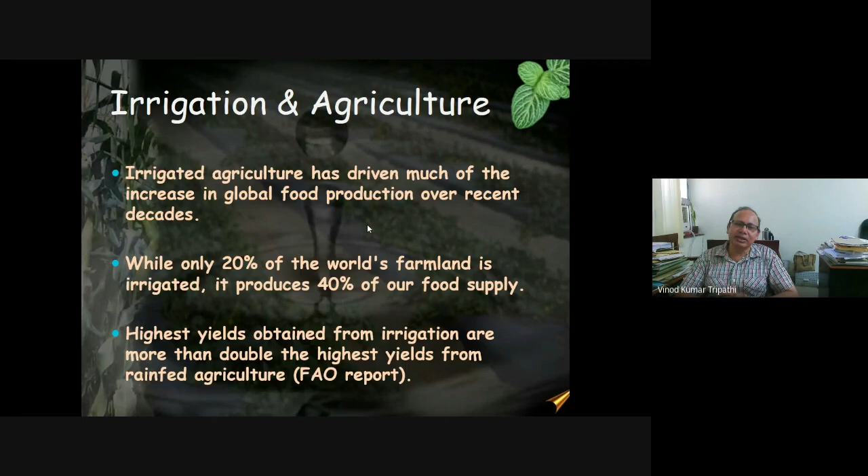We obtain higher yield under irrigation because water gives a multiplicative enhancement in the yield response. Poor quality water contains different types of undesirable elements. Number one is salt content, which we see in the form of salinity. Salt content depends upon the geological formations and the processes in which the water is utilized.

If that process produces salt, then the wastewater coming out will also become saline. Then the water infiltration rate: because of high sodium and low calcium content of the soil or water, the rate at which water enters the soil reduces due to the flocculating nature. So the rate of infiltration is also reduced because of the availability of these ions.

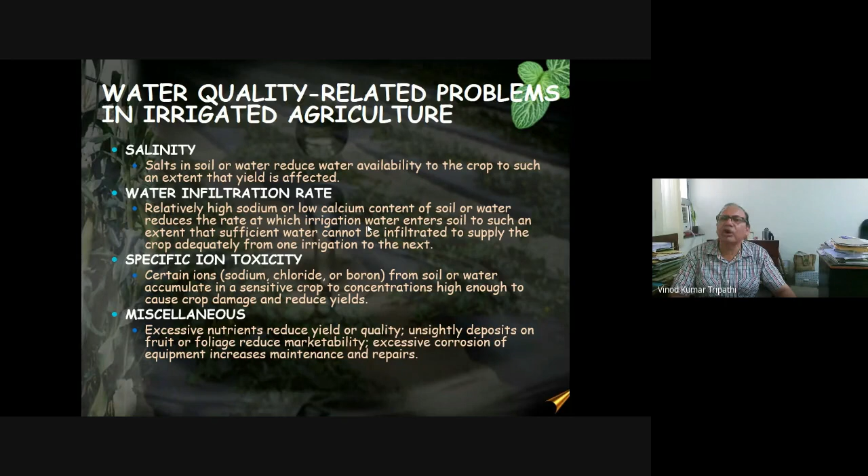Then we have specific ion toxicity. Specific ion toxicity depends upon the different types of industries. Some industries give a particular ion, another industry gives another type of ion toxicity, because of the different processes involved in utilizing the water, and the wastewater coming out contains different types of specific toxicity.

Then we can see here another type of problem which contains the poor quality water, that is the microbial contamination. These microorganisms, we can say bacteria, virus, helminths. These are the microbes which are present in the water, and sometimes they are not visible by the naked eyes. So this microbial contamination is also present.

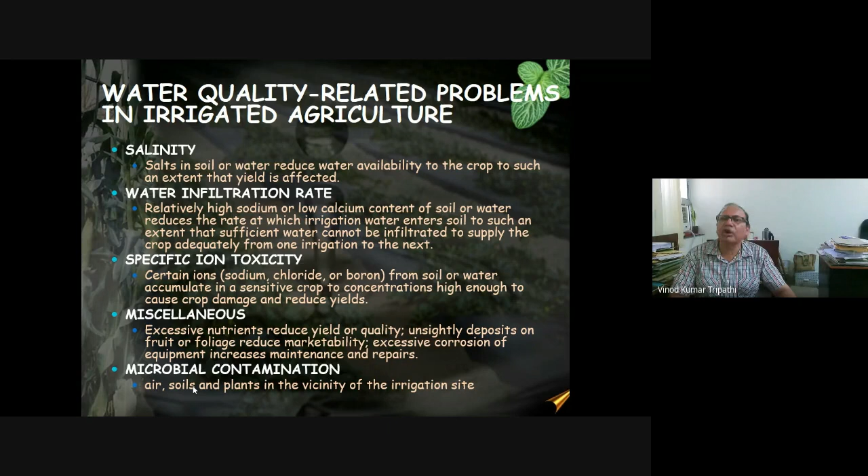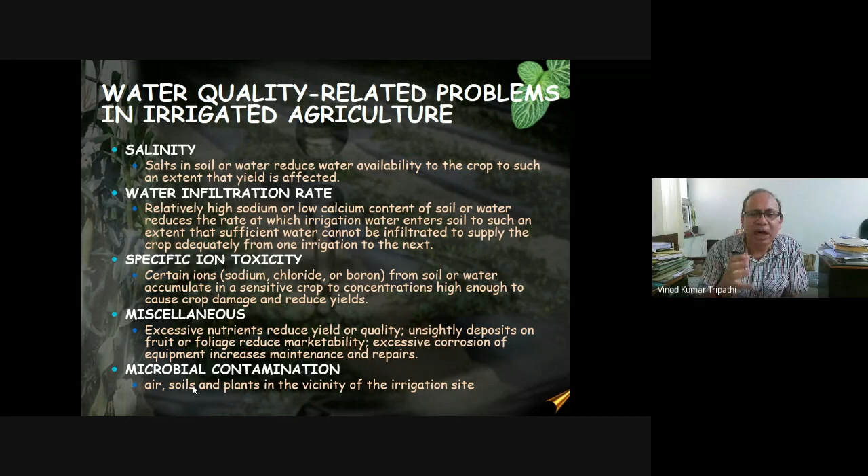So the issue is that these challenges we have to, when we plan the utilization of the poor quality water, we have to overcome: how we can reduce the toxicity of these elements, these microbes. Reduction in the toxicity is the main important issue for the utilization of this type of water.

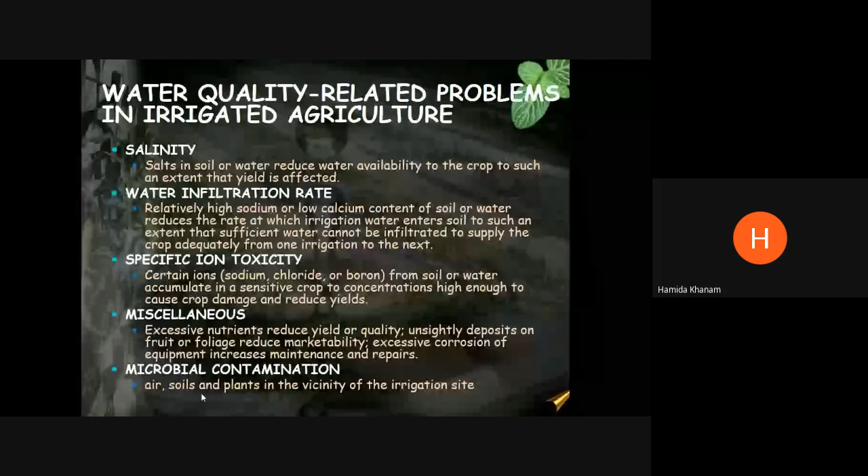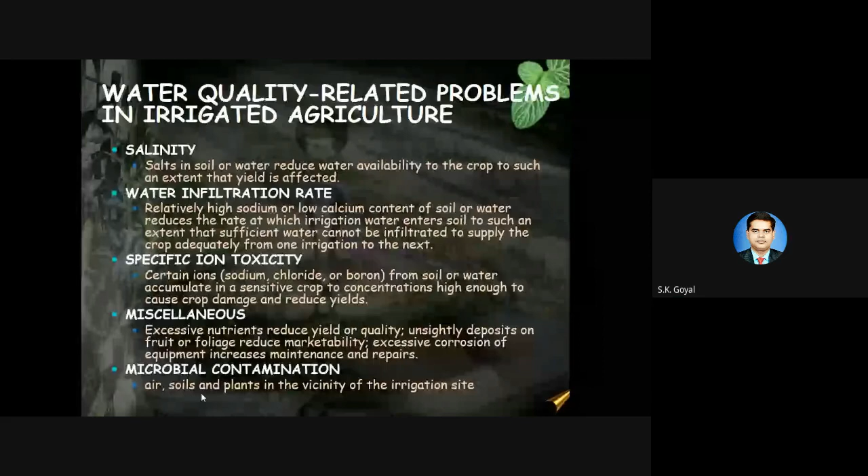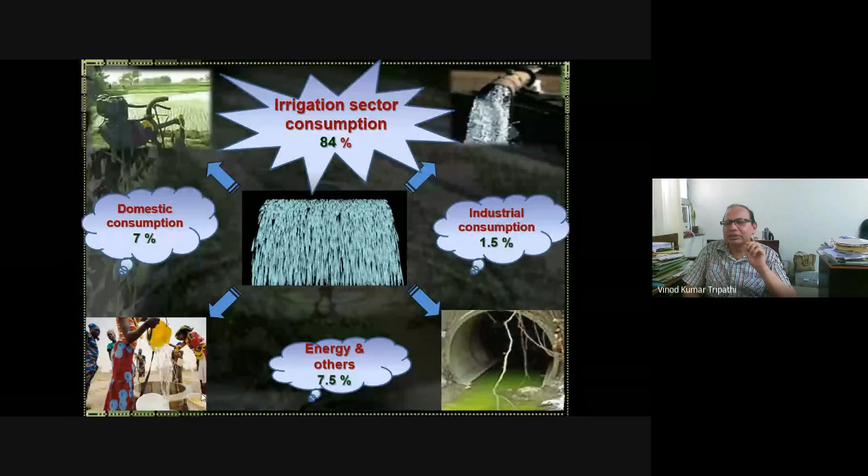Thank you. So, friends, if you see the consumption of water in our Indian subcontinent, the irrigation sector is the highest consumer of water, and after that you see our energy and industrial sector. In the energy sector, at most of the places, thermal power plants are coming. Thermal power plants utilize steam because steam turbines have better efficiency in comparison to the other turbines.

So the heat generated through the coal or through radioactive reactions produces the vapors, and that steam is utilized for the operation of the turbines. And in the domestic sector, in our day-to-day life, we are utilizing water, but the highest consumer is the irrigation sector. So this is also the need of the hour. We can do something so that we can fulfill the irrigation sector demand.

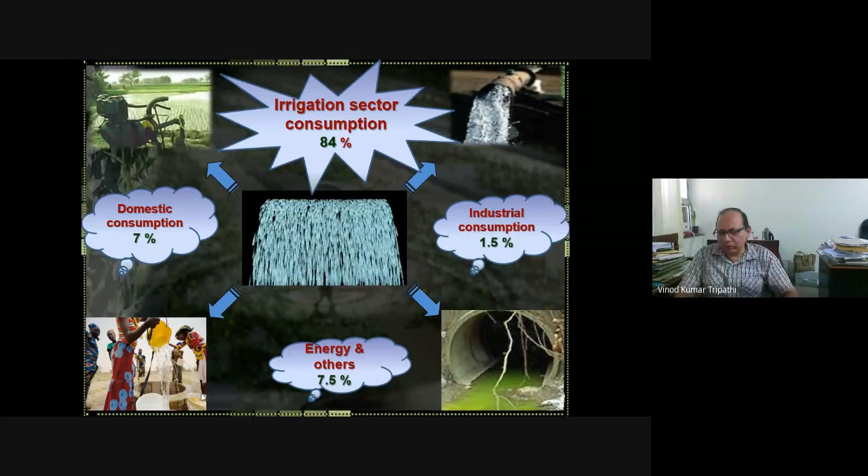Due to the development of the industries and the growth of the population, we are bound to divert more water towards the domestic sector and industrial sector. So if you divert more water towards the domestic and industrial sector, definitely we have to reduce the water demand in the irrigation sector. This will be the challenge.

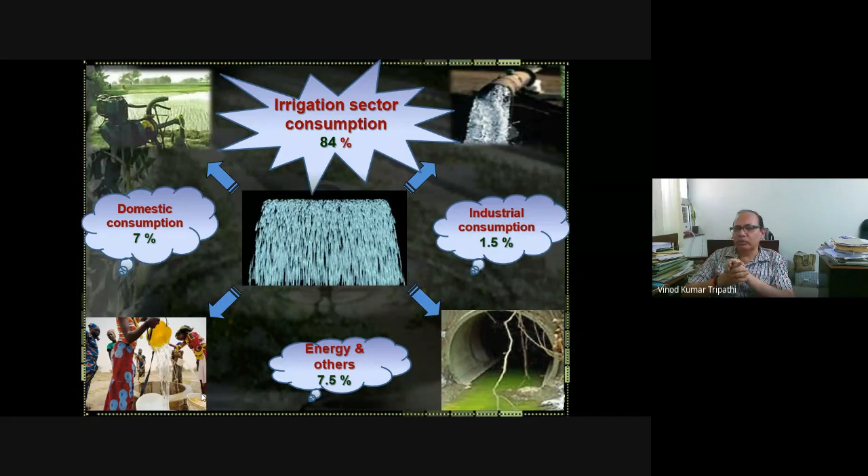So if you want to reduce the good quality water demand in the irrigation sector, we have two options. Number one, we can utilize the water which is used in other sectors as wastewater in the irrigation sector. And second, we can enhance the efficiency of the irrigation sector. If we can enhance it, we can utilize less quantity of water for more area through advanced irrigation methods like the micro irrigation method.

So that's why in this topic I have concentrated on two important aspects. Number one, utilization of poor quality water in the irrigation sector to fulfill the irrigation sector demand, and it will also be helpful to fulfill the future requirement of good quality water in the other sectors like the industrial sector and the domestic sector. So that's why in this topic we have taken micro irrigation and poor quality water.

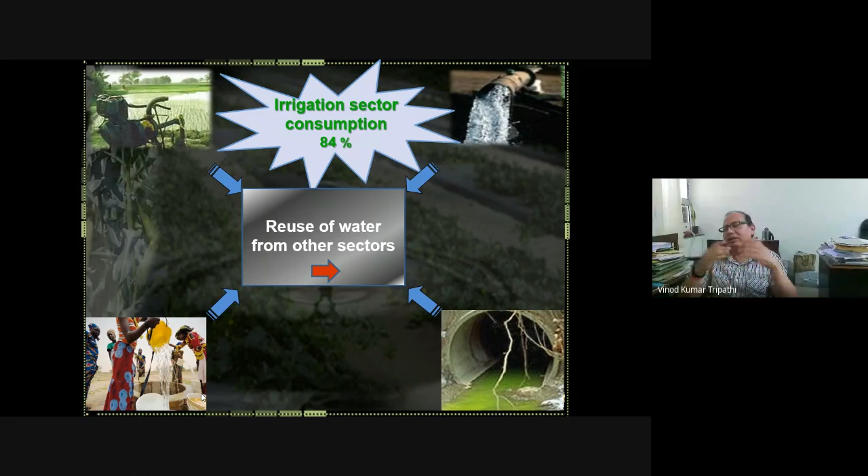Then friends, if you see nowadays in India, this is a little old data, around 40,000 million liters of wastewater is generated in different parts of the country. So a huge quantity of wastewater is generated, and this is old data. In future, due to the growth of urbanization, if you see the world level, the urban population has crossed the rural population. So at the world level, what is the scenario?

If our world becomes more urban in comparison to rural, wastewater generation from the urban area will be higher, and the government does not have much capacity to treat this wastewater at the individual level. So it gives different types of restrictions to the industries that they should treat this wastewater before releasing it out of the industry, so that there will be less toxicity in the environment.

Number one. Second, the government is also planning: in the industrial zones, the government is making the plan for common treatment plants. In the common treatment plant, they give a certain level of treatment to the wastewater which is generated from the different industries. But much emphasis is on the industries because they are giving much polluted water.

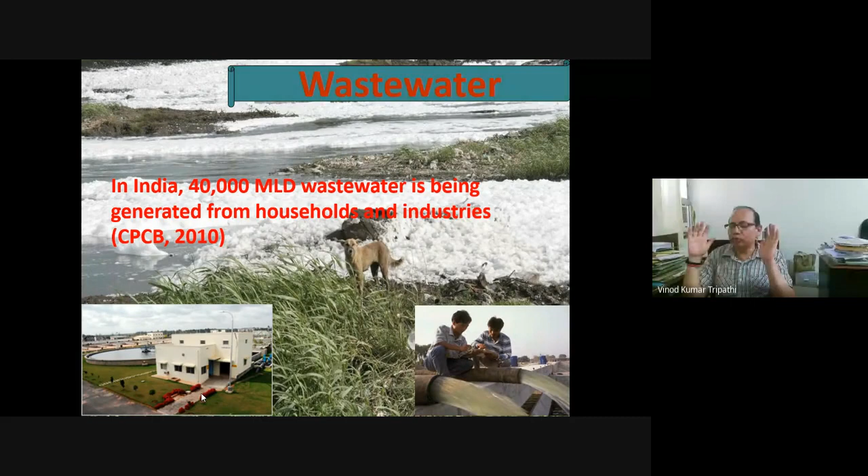But in the domestic sector, not much importance is given to the wastewater which is generated, even at the government level or municipality level. They are giving importance to a certain level, but they are giving more priority to the industries, because they generate the more polluted water, which has more contamination. So under this scenario, we have the concern that the wastewater which is generated, we can utilize it in the irrigation sector.

So number one, you can say the good thing is the quantitative terms. Quantity means we have a huge amount of wastewater. And second, if wastewater will be utilized, then we will give some treatment to it. Otherwise, we will throw it into the environment. If we throw it into the environment, it will create environmental challenges and harm to our ecosystem. We have to clean it and utilize it, so it will be economical. Otherwise, if we just throw it, it will create environmental challenges.

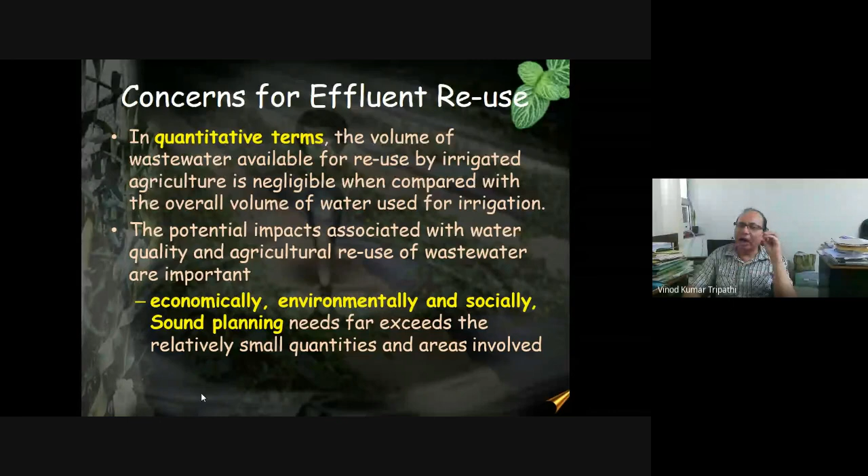So that's why we want quantitatively, economically, environmentally, and socially sound planning for the utilization of the wastewater. And we have to see some public health standards in the utilization of this wastewater, wherever this water is going to be utilized. Let's say we are utilizing it for a particular crop, so we have to see the produce, the quality of the produce, and the standard of that produce, the different elements available in the produce against the different standards.

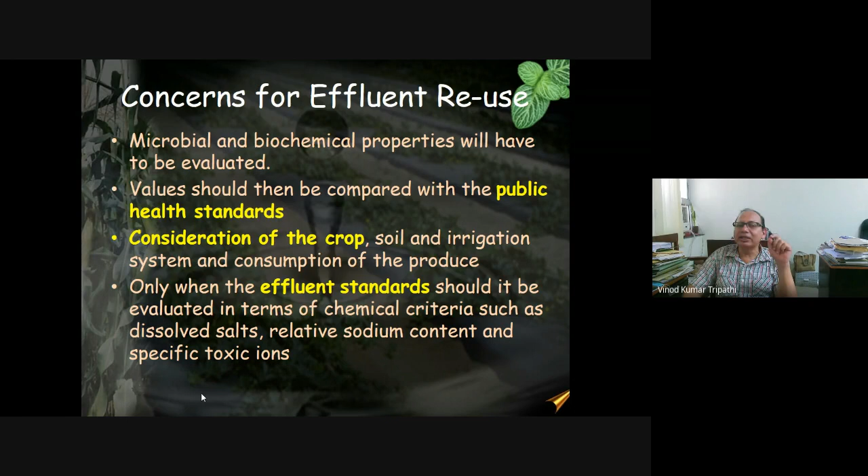So that's why there is a need. We have to develop some public health standards. Some standards are already there to utilize this type of poor quality water, and in which crop we have to utilize it, so that it will be less harmful for the people who are going to use that produce.

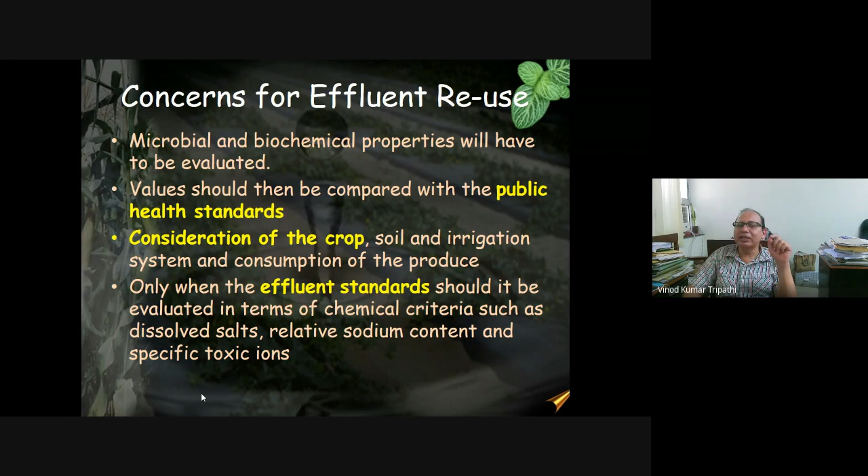So one of the primary treatment systems for poor quality water which is feasible, I'm not recommending those things which can be utilized for the higher level industries. Higher level industries have the money, they can utilize different types of water treatment systems. But at the farmers level, for the irrigation sector, we have limitations, meaning we can treat the water up to a certain standard, a certain level. Otherwise, we cannot utilize it. So that's why one of the primary systems for the treatment of this wastewater or poor quality water is the constructed wetland.

In the constructed wetland, the main important aspect is sedimentation. Means whatever higher weight or higher volume objects, elements, or any type of impurities are available in the poor quality water can be settled. Due to the action of gravity, they will settle down. So first we can see that with the help of the sedimentation process. Then we can pass this water through the filters. Those filters are in layers.

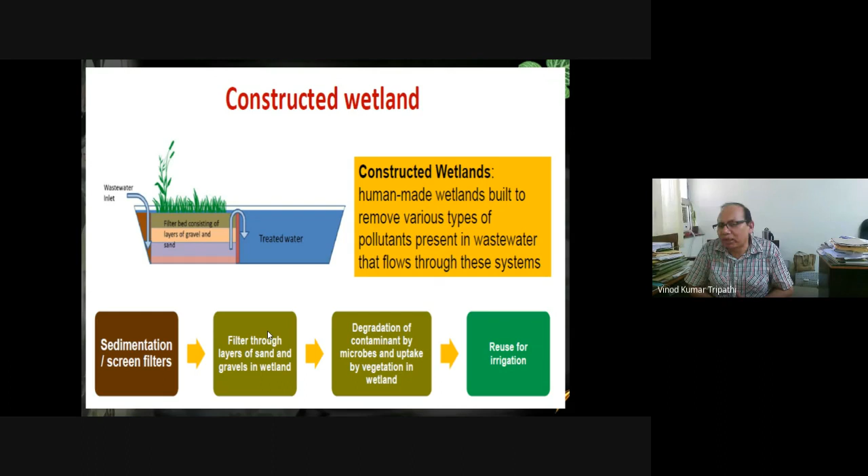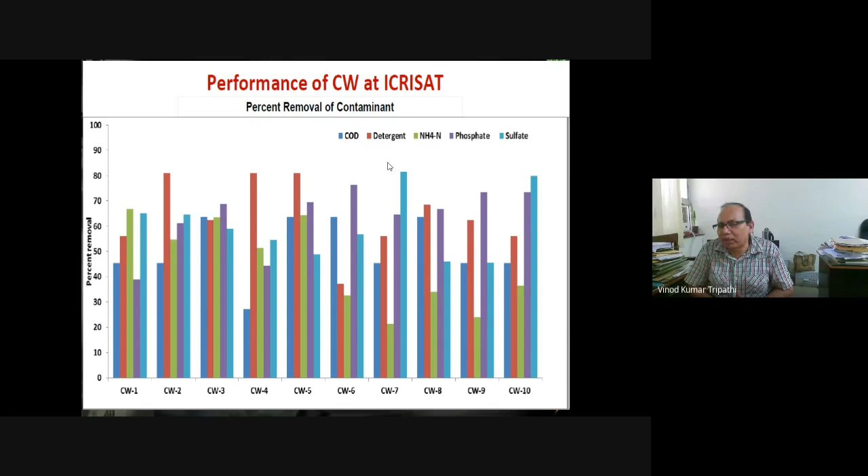So up to a certain level of treatment, a certain level of purity, we can provide with the help of constructed wetlands. And in the constructed wetlands, we can see here that for these chemical elements, a certain level of reduction or percentage of removal is possible. In this, you can see ammonium can reduce by 10 to 70%, nitrate, phosphate, and these species are utilized for constructed wetland purposes.

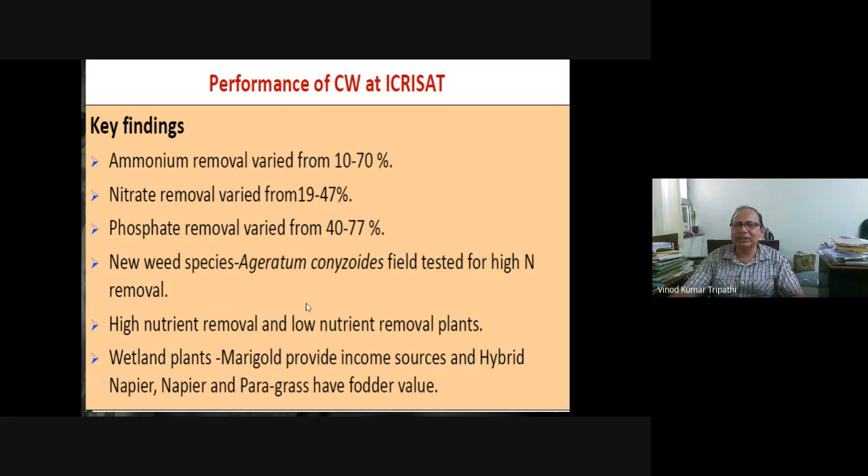Then if we can reduce the impurities up to a certain level, then we can use this water. We are advocating that we can use this water through drip irrigation or micro irrigation systems. Why is it? Number one, because micro irrigation systems have higher water use efficiency. Second, if we utilize these waters with the micro irrigation system, it will create minimum contact with the plant and the operators.

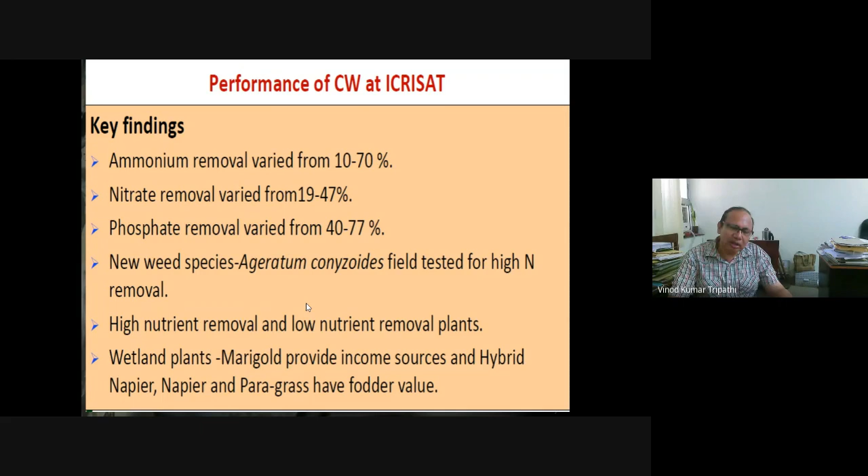So if there is less or minimum contact, the transfer of contamination from poor quality water to the irrigator, or to the fruits, will be minimum. So that's why it is also advisable. If we are utilizing it, it will be better; we have to utilize this with subsurface drip irrigation.

And if it is coming in your mind that there will be more cost involvement due to the use of subsurface drip irrigation, in that aspect I want to say that you can visualize here: in surface irrigation, on top of the land surface, there is wetting. Due to this wetting, there is germination of weeds. But in subsurface drip irrigation, a very small amount of water comes to the top of the land surface, while more water is available in the root zone.

So what happens? The amount of weeds growing under subsurface irrigation will be less in comparison to surface drip irrigation. In this way we can reduce the weeding cost and weedicide cost also. That cost we can divert to even a 5 centimeter thickness spade or any implement which can make a depth of 15 centimeters from the land surface. It will not have much cost involvement and is very good for protection from contact of the wastewater with the irrigator and the produce.

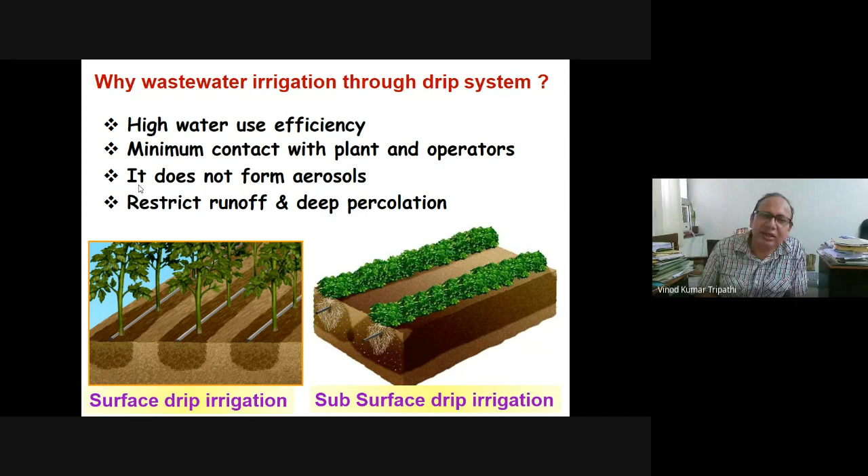But the limitation is that if we utilize it for the drip irrigation system, it requires a very good filtration system. If the filtration system is not good, then, as you know, water in drip irrigation comes from the emitters, and the emitter has a very small diameter path. So foreign particles will be deposited in the path and clog the emitters. To avoid that, we have to go for a very good filtration system.

And those filtration systems require frequent cleaning of the filters, because if you don't clean the filters, there will be more pressure on the pump, your energy requirement will be enhanced, and there will be a reduction in the water application rate. That's why, for utilization of wastewater, automatic cleaning of the filters is recommended. After certain hours of operation, the filters automatically go for back flushing, and in the back flushing operation they are automatically cleaned.

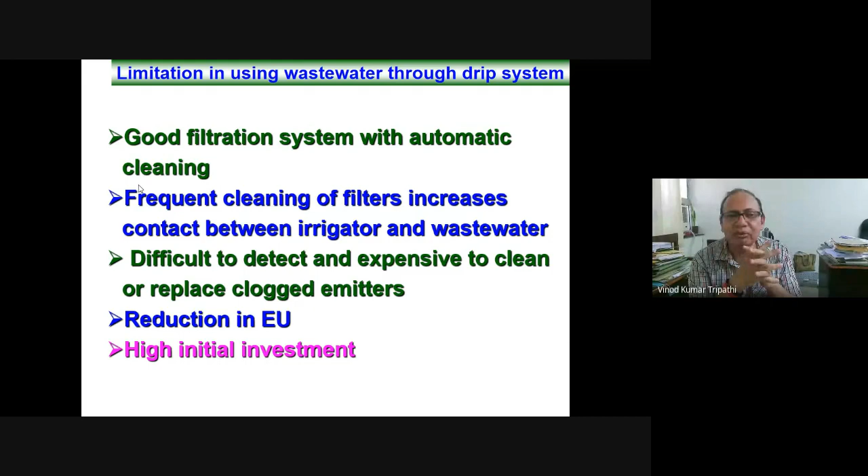For better filtration, there is a strategy which has been utilized: we can use the gravel media filter and disc filter in combination. What is the advantage? The pore spaces in the gravel media filter are bigger in comparison to the disc filters. In disc filters, the discs are stacked one over another, and the space between two discs is very small. So even soluble impurities will be reduced to a certain extent as they pass between the discs in the disc filters.

And we can utilize these waters; an experiment was conducted for surface and subsurface placement, at 15 centimeters and 30 centimeters. Better performance was achieved with subsurface placement of the emitters at 15 centimeter depth.

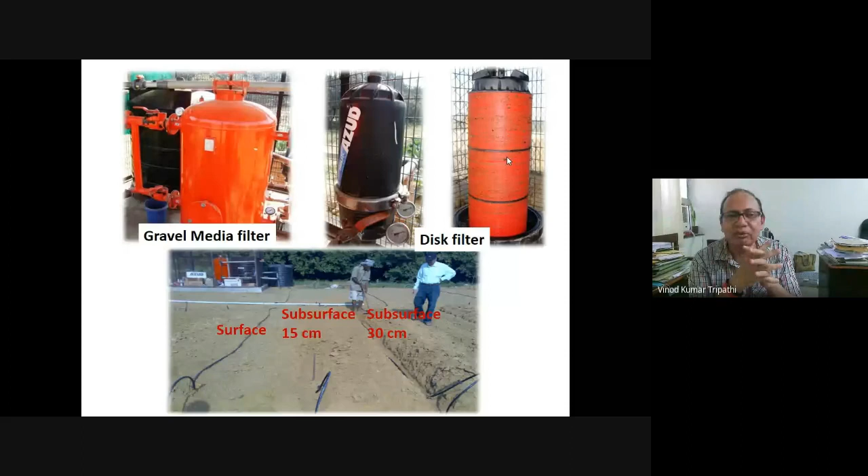And these are the physical and chemical impurities, but biological impurities, or you can say microorganisms, are also available. The counting of these microorganisms we can do through different methods. We can grow the colonies of the microorganisms on agars, or we can utilize the total coliform by the MPN method for the estimation of the impurities in terms of microorganisms.

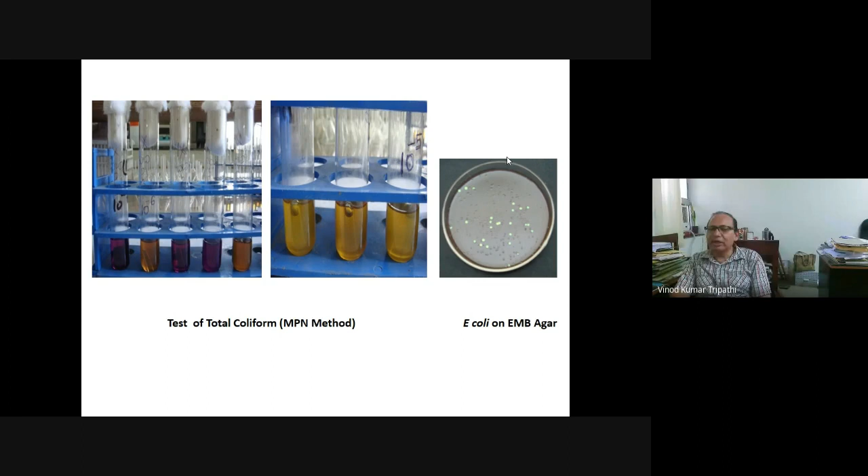One of the microorganisms is E. coli. What is the availability of E. coli if we utilize this water in the surface and subsurface drip irrigation system? The availability of E. coli at the surface and different depths we can see, if we apply the water at the subsurface by placing the emitters 30 centimeters below the ground, placed at 30 centimeter depth.

So we can see that the availability of E. coli on the surface of the land is zero. E. coli is not detected on the surface of the land if we place the emitters at 30 centimeter depth. Their availability is lower, or moderate, when we place the emitters at 15 centimeter depth. But the highest availability of E. coli on the land surface is when we provide the water through surface drip irrigation. This is the scenario we have seen in the crop 25 days after transplanting.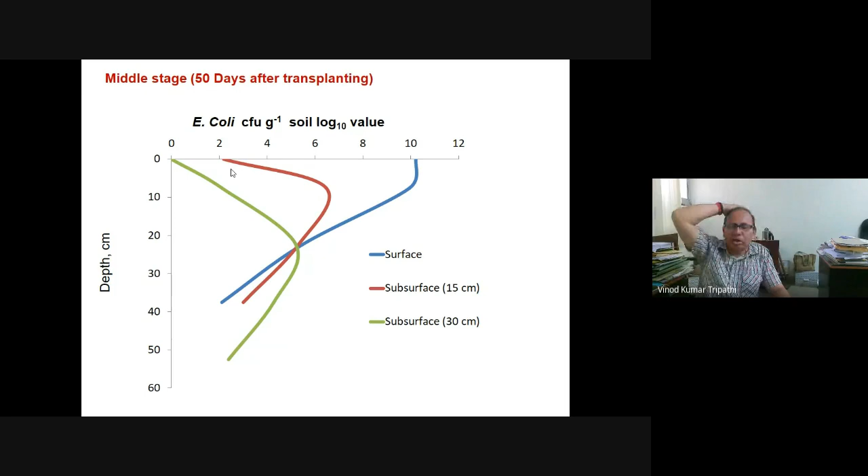So still we can see there is no E. coli when we place at 30 centimeter depth, but at 15 centimeter depth there is availability of E. coli at 2 log values, not more than that. After a certain period, the population of E. coli is consolidated. There is no enhancement in the E. coli population after certain days of irrigation.

So this is the crop in which this water has been utilized. This is the produce. And we can see the performance of the leaf area index under different methods of irrigation. D1 is the surface irrigation method, D2 is subsurface at 15 centimeter, and D3 is subsurface with placement of laterals at 30 centimeter depth.

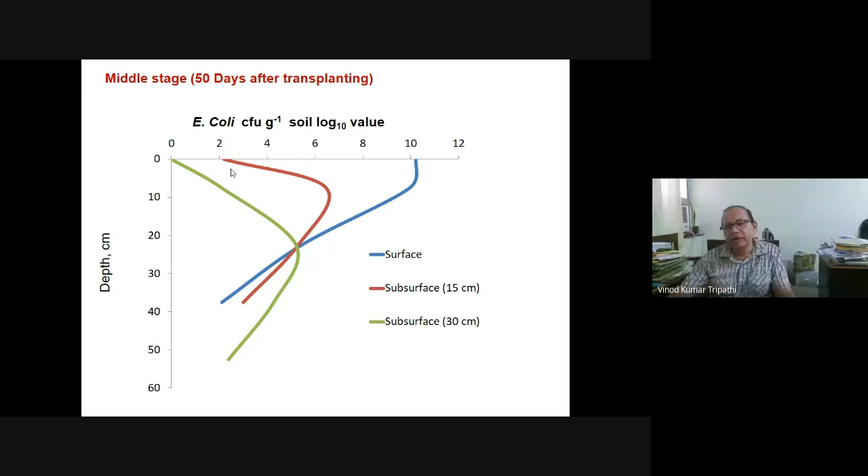Under this condition, initially the leaf area index is higher under the surface placed laterals. But after 45 to 50 days after transplanting, we are getting better performance from the subsurface placed laterals. At 15 centimeter depth, subsurface placed laterals give a better leaf area index in comparison to the other treatments, in form of D1 and D3.

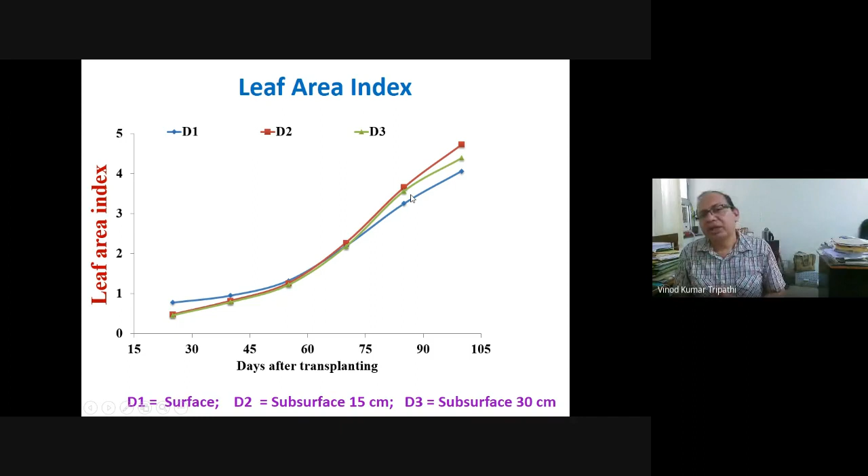If we see the yield in the different treatments, there is a higher yield in the second year in comparison to the first year. The reason is that whatever nutrients are available in the wastewater or poor quality water are accumulating in the soil and giving better results in the next years.

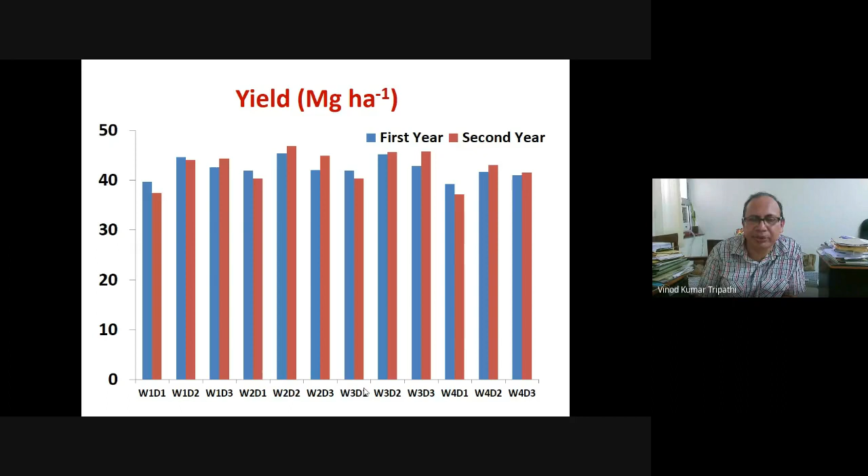Because this poor quality municipal water contains different types of nutrients, we can save NPK fertilizers. For the brinjal crop, or eggplant, it has been calculated that it can save 28% N, 21% P, and 38% K. So what is the advantage? With the use of poor quality water in terms of wastewater, we can reduce the fertilizers that should be applied, because wastewater already contains some amount of nutrients.

The safe limit for iron is 450 milligram per kg, and we can see this iron content, except in one treatment, is lower in all treatments, but close to 450 milligram per kg. Nowadays a fortification program is going on because ladies are lacking and suffering from anemia; students at small nurseries are also given iron tablets.

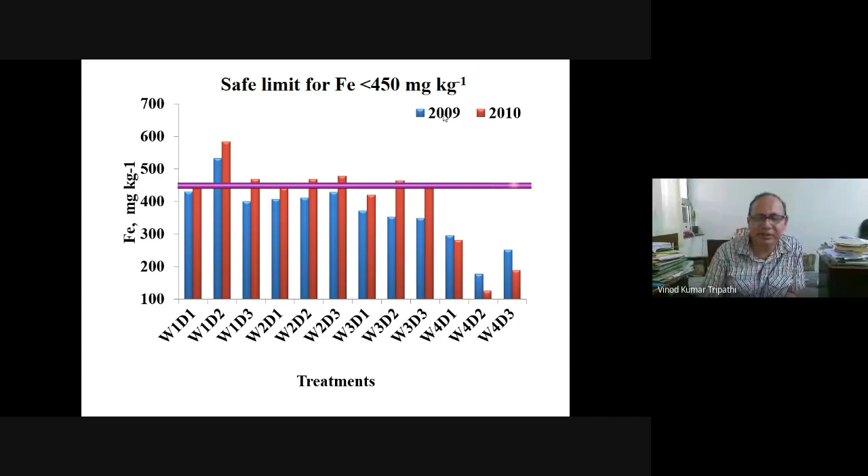For the crop restriction point of view, it is recommended that crops or produce eaten raw are not advisable to irrigate with poor quality water. So either we irrigate with good quality water, or we don't utilize it on crops eaten raw, like those used for salad purposes. Generally we have to restrict this.

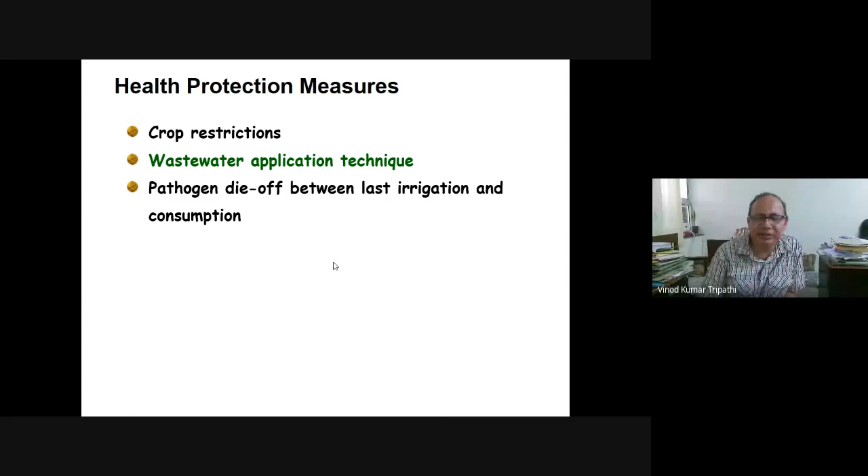Then wastewater application technique. We have to utilize such an application method so that our crop will grow and we can fulfill the irrigation demand, but we have to apply a limited amount of water, because this water contains impurity, and if applied to the soil it will accumulate. In the long run, after 20-30 years of continuous application, this may create problems, and there is a need to study the long-term impact of poor quality water on soil under different methods.

The third aspect is the health protection measure of pathogen die-off. If some pathogens or microorganisms enter into the plant system, it is not necessary that they will survive for a longer period after entry; they will die off after a certain period. Let's say in some plants they survive for 1 week, some plants for 10 or 15 days.

So what we have to do is stop poor quality water irrigation before the die-off period. Let's say the die-off period is 15 days; before those 15 days, we have to stop poor quality water irrigation. And if there is a need for further irrigation, we can apply good quality water so that we can get health protection.

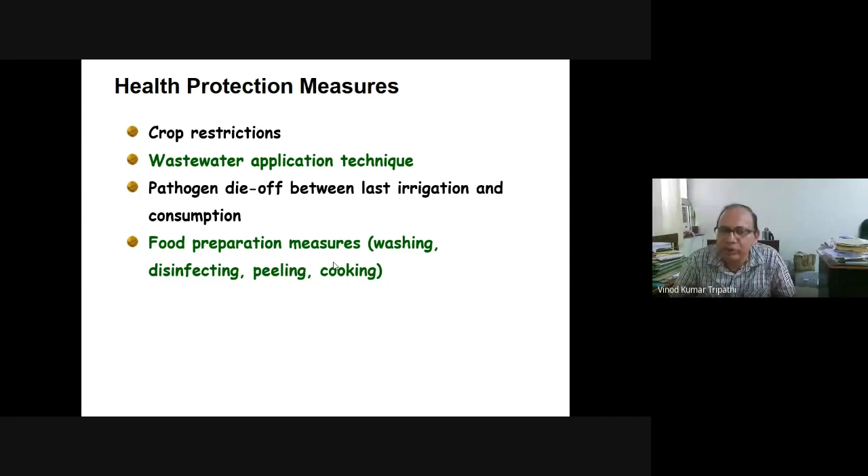For food preparation measures, we have to apply good quality washing. Then we have to use disinfectant and peel the produce, so that whatever microorganisms are available on the surface will go out. We have to cook the material properly, so the microorganisms present will die due to the higher temperature in the cooking process.

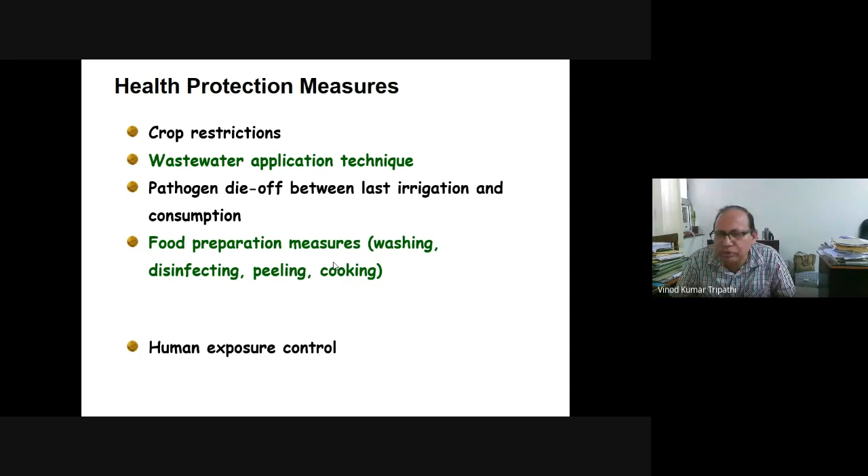Then human exposure control. Bacteria and virus can enter into the human body from any naked portion. Our hand is open, naked, our face is naked. Under these conditions, microorganisms can enter the body. So we have to reduce human exposure by providing some control.

And then wastewater treatment we have to do. The combination of these measures depends upon labor, fund, land, water, and social and cultural practices. It is not necessary that all practices are possible to apply at one place, but in combination, if we can apply them, it will be helpful.

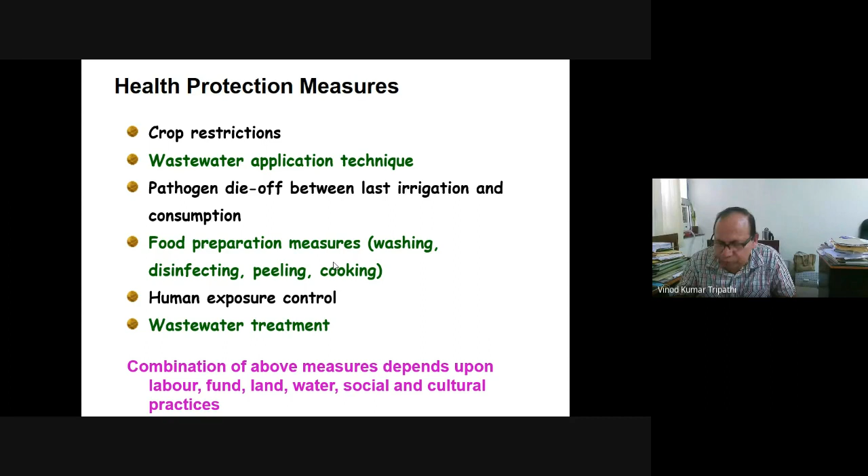So to come to the conclusion of this study: with the combination filters, the constructed wetland improves, using a combination of filters - drip irrigation filters, meaning gravel media filter and disc filters. If we can utilize them in combination, it gives better performance.

We get more clean water, better emission uniformity, less clogging of the emitters, and high leaf area index when placing the laterals at 15 centimeter depth, because of better utilization of nutrients, more utilization of water, and better root volume. More root volume will be under the wetted condition, so it provides more nutrient intake capacity for the plant.

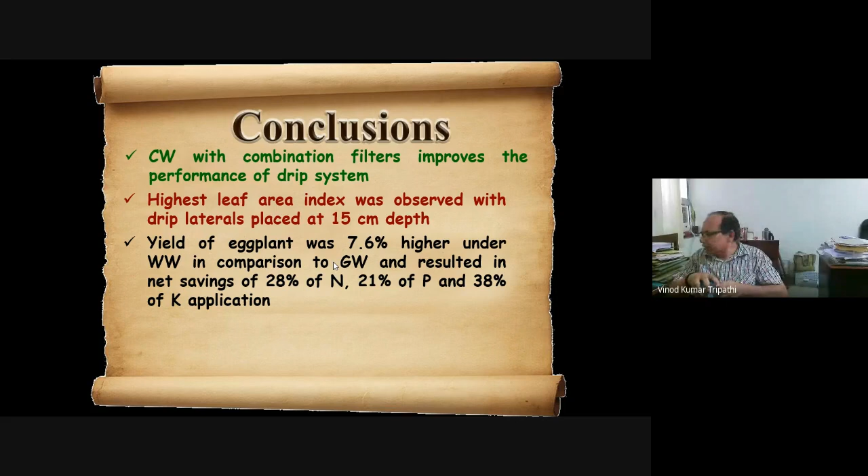Here we can see, for this experiment conducted with eggplant, wastewater irrigation gave 7.6% higher yield in comparison to groundwater irrigated plot, and we can save 28% nitrogen, 21% phosphorus, and 38% of the potassium application - meaning less amount of nutrients will be required to fulfill the crop demand.

And regarding heavy metal content available in poor quality water, we see these specific toxic elements have less availability in the produce, and they are within the control of the prescribed limit by different national and international standards, except iron, because iron is also required. We are doing different programs to enhance iron in women and children.

So this is the thing, friends. If we can utilize the wastewater, we can save water for our coming generations, and we can make it from waste to wealth, and make it an asset.

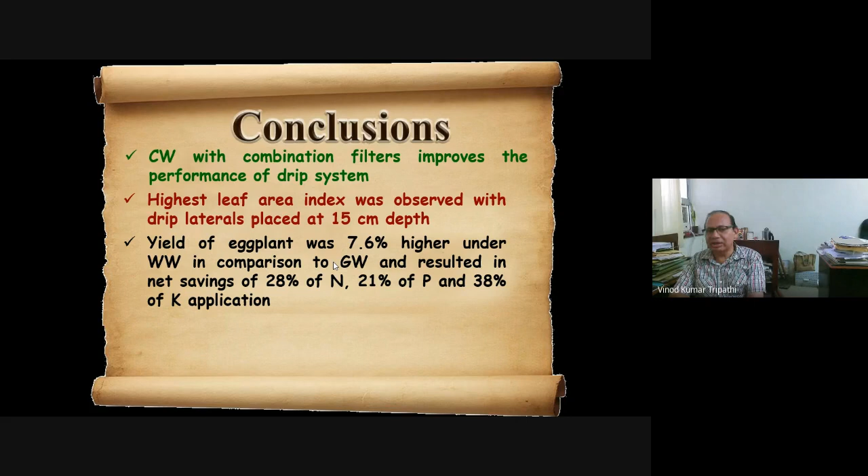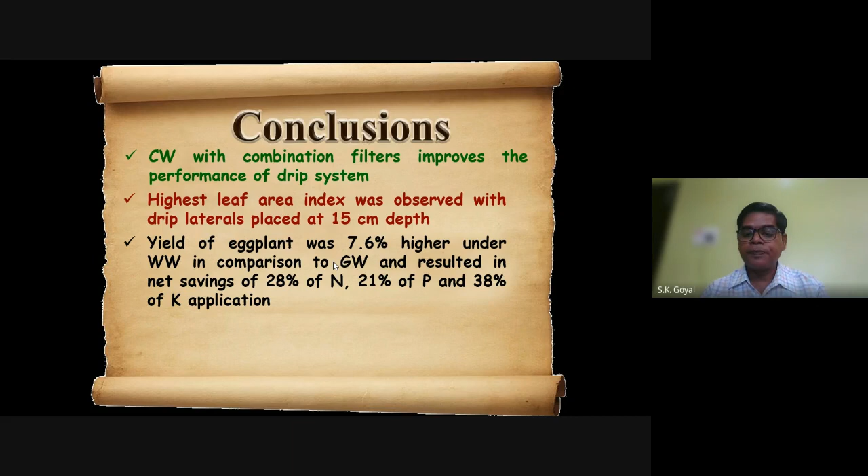So thank you, sir, Goyal Saab. Yes sir. Ma'am Hamida Khanam, please unmute the participants so they can ask questions. Participants, if you are not able to unmute your mic, please write the question in the chat box. Sir can directly see your question and slide.

I am able to see the chat box. I think if anybody writes a question, I will definitely give the answer. Please participants. Okay, if there is no question, it is a very good lecture, sir.

Actually you have finished your talk within the time. We have a standard time of 1 hour, oh sorry, 40 minutes. Yeah, someone is writing, sir. Amit Biswas is asking, what are the possible wastewater treatment technologies?

There are a lot of technologies, but what I have given here as exposure: one thing is that we can go for constructed wetlands. Then we have to utilize the water for filtration systems. We can utilize combination filters.

In the constructed wetlands, I mentioned we go for gravity filtration, meaning foreign particles which have higher weight can settle down. Second, if we pass the water through filters, in the porous spaces some impurities will be prevented. So in this way we can utilize it for irrigation purpose.